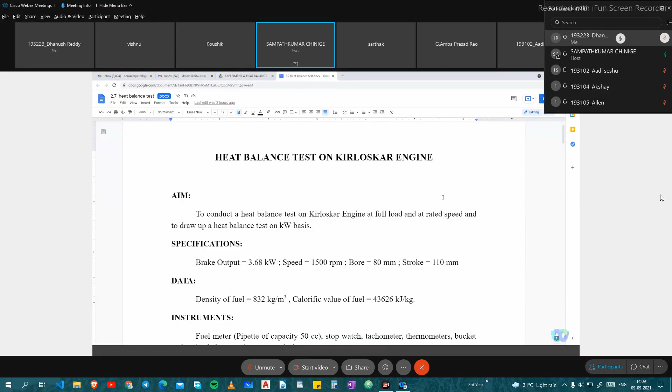You have 128. That's 120. 40 and 40 maybe. 40 from A section and 40 from B section. One series is more than the other, I think. More A section people than B section, sir. Yeah.

One is not there. 2, 3 not there. 4, 5, 7, 8, 9, 10, 11 not there. 12, 13 not there. 15, 16, 17, 18, 20, 21 not there. So some

Gupta sir, now you are sharing, sir. Sorry, sharing the screen now. Anybody can do that. I can restrict, but I allowed that anyone can share. Among the faculty? Among the students also, if they want to share, immediately they can do. If they have done some calculations, they can immediately share and show it. Okay.

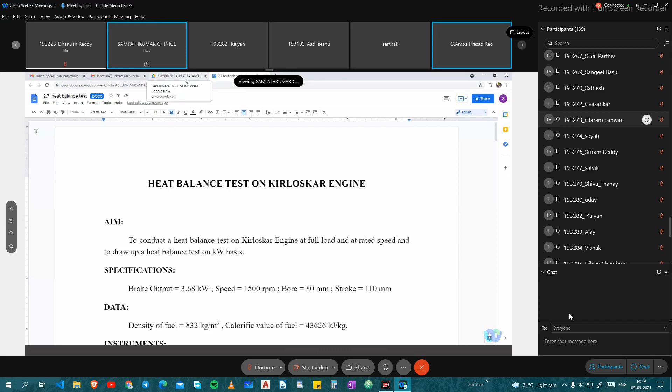Yeah, as I was telling you, this particular experiment is a heat balance test on a Kirloskar engine. The make is Kirloskar; it is a single cylinder, water cooled, vertical cylinder diesel engine. As the name suggests, we are balancing. What we are balancing: we are trying to see how the energy distribution takes place in a typical diesel engine. So it is also called an energy balance test.

So whatever input we are giving in the form of fuel, which carries some calorific value, how is that energy being distributed? As I told you, the engine is a classical example of a corollary of the second law of thermodynamics, and our engines work under the constraints of the laws of thermodynamics. Unless there is a sink, unless you lose or dissipate the heat in another form, useful power cannot be obtained. That was the Kelvin-Planck statement of the second law of thermodynamics. Accordingly, our engines are functioning.

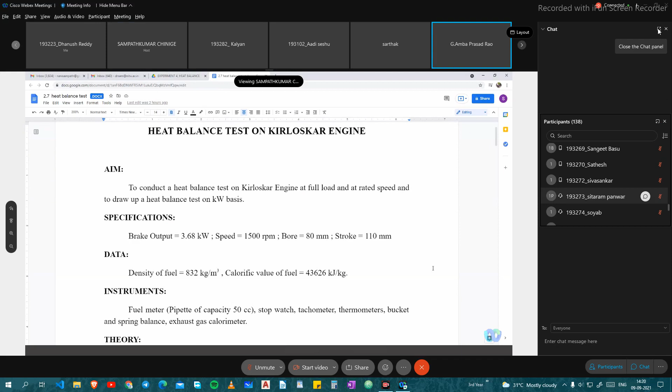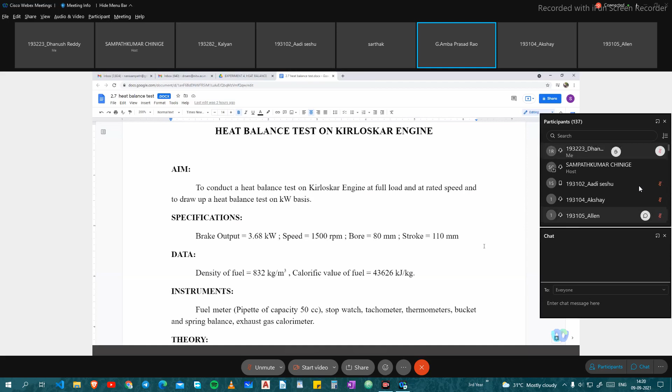So in a practical engine, how does the energy distribution take place? For that, we are conducting the experiment. The basic aim of this experiment is to conduct a heat balance test on a Kirloskar engine at full load. In our experiment, we have conducted it at half the full load and at rated speed, and draw up a heat balance test on a kilowatt basis. These are the specifications of the engine, which I have shown earlier.

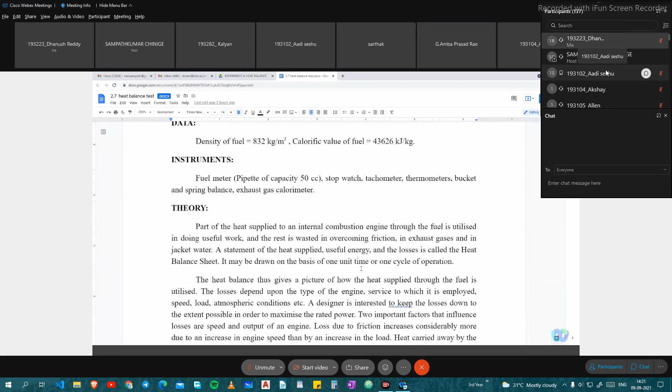We conducted an engine performance test on a Kirloskar engine, which was connected to a DC shunt dynamometer. The specifications of that engine and the engine on which we are performing the heat balance test are one and the same. The data of the fuel is as follows, and what we require in addition to the engine test setup are a fuel flow meter, stopwatch, tachometer, and thermometers at strategic locations, and the bucket, meaning a measuring jar. Instead of a bucket, we have a measuring jar, and we have what is called a spring balance.

Instead of a spring balance, as I told you earlier, we used to have a bucket where we collect the water from the engine outlet, the jacket water outflow, and with the help of a spring balance we used to weigh that water and know how much water is flowing through the engine. Of course, the engine is incorporated with the exhaust gas calorimeter. These are the basic instrumentation we require for the conduct of the heat balance test.

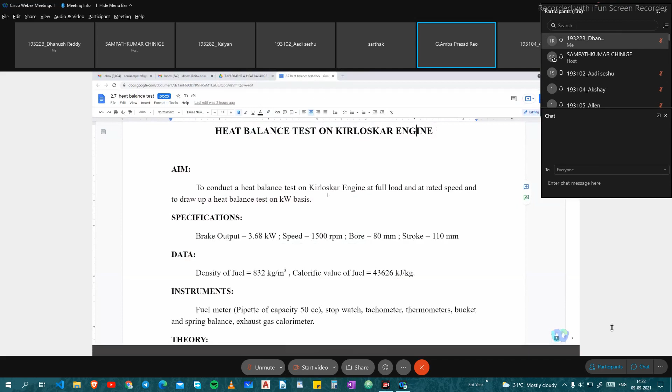As I told you, heat is given in the form of fuel: mass flow rate of fuel multiplied by calorific value of fuel. This product, mass flow rate of fuel multiplied by calorific value of fuel, we have taken as the denominator while calculating the thermal efficiency of an engine. Do you agree with me? Please say yes or no.

Yes, sir. Yeah. So, hoping that you would have done the required calculations in the performance test on a single cylinder engine, which I explained last class. So that denominator is the heat input, and we also observed that you got some efficiency like 28%. How much thermal efficiency at full load did you get?

Can anybody give the values? Sarthak, Vishnu, Akshay, Allen, whoever. You have calculated, no? Sudarshan Reddy, Geeta, Manoj, somebody should speak out. Aadi Seshu, Akshay, no response?

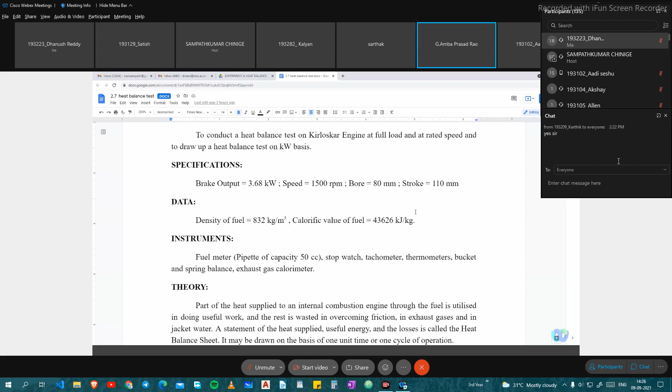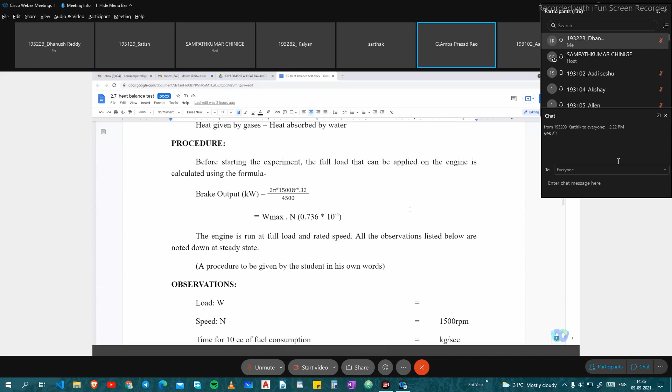Suppose you are coming to the hostel after vacation from your home, and your papa gives you 10,000 rupees as monthly expenditure, with an expectation that you would pay about 6,000 towards your food expenses in the hostel and the remaining 4,000 towards your books or something. You will try to manage your food amount to 6,000; that 6,000 you are paying in the hostel.

Out of this 4,000, you go to movies, you give your friend some loan, or you would have borrowed some loan from your friends and you pay it back. And sometimes you will do over expenditure. So likewise, you will try to manage. If you are a good manager of the amount taken from your parents, you will try to maintain some balance sheet.

Or even for shopping, if you go taking 1 lakh rupees, at the end of the day after coming back from the market, you will account how much you have spent, where you have gone right or wrong. So you do some balance like that in terms of money. Similarly, for an engine, how much it is taking, how much useful power it is developing, and how much loss it is leaving, we are accounting. It is an accounting of energy taken by the engine in the form of fuel input. So for that, there is a systematic procedure.

And the objective of this particular experiment is to show that at full load. So how do we arrive at the full load?

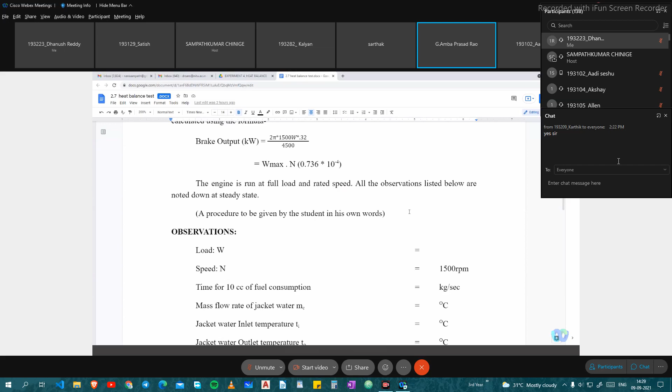W into R. R means the distance from the center line of the engine at which the load is being acted. That is the torque arm distance. So 32 centimeters away from the center line of the engine, the load is acted. So we take all that, and finally the variables are W and the speed. Because it is a constant speed engine, only W is a variable.

So what is the W max? Maximum power we must know. 3.68 we have seen on the top side. So if I equate it to 3.68, we come out around a value of 7.5 units. So I load the engine by altering the water flow going into the engine. In a short while I will show the video where exactly water is flowing to the engine and how it is being controlled, so that the engine spring balance will show the reading equivalent to 7.5.

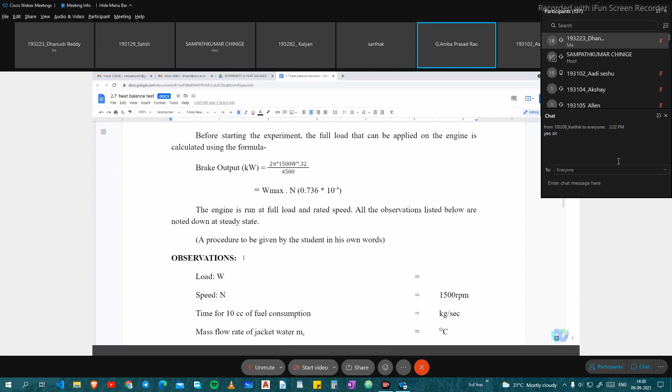Because our experiment is aimed at conducting half the full load, we are trying to load the engine to 3.75 units, but allowing fuel to the engine in such a way that it will run at 1500 RPM, because this experiment is again at a constant speed. So likewise, we bring the engine to half load or full load at rated speed, and the remaining observations are made. So let us see the demonstration of the engine while running.

Please, Sampath Kumar garu. Yes, sir. Yes. So while conducting the experiment, I will also explain how it is started, where the intricate components are. Okay, please. Sir, is the video available, sir? Yeah, it is being shown. Yes, you can play.

It's no volume, no? It's not coming, sir. Volume is not coming. Sir, once try sharing files. In the share option, there is a file share option, right side in upper tabs. When you click on share, it will show window, file, whiteboard. Try sharing file, why it's not visible. The video is not visible. Visible, but not audible. Audio, sir, it's an audio problem, right?

Just a moment. So what you are saying? Can you repeat? Once open WebEx, sir.

Should I stop sharing? No need, sir, once open WebEx, I want to know something. Like I also don't know, sir, but that option, it is basically played in the morning. When we checked it, actually it should come. Just a moment, it's basically to do with the voice, nothing else. Initially it was not there, I think, Dr. Sampath. Afterwards you gave volume, no? Can you try now, sir? Let's try once, just move it further.

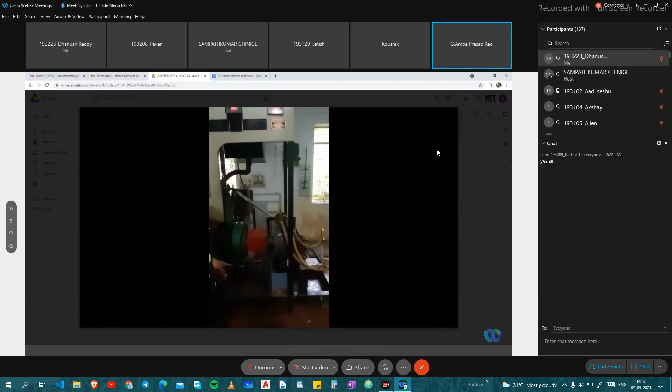So this, as you are seeing, this engine setup is different from what we had earlier when we were conducting the performance test on a single cylinder engine. Of course, the green part you are seeing is the engine part. So here this is a dynamometer, and these are all the plastic tubings for water flow. As I told you, it's a water brake dynamometer. So these pipelines are going into the dynamometer, and there are control valves by which you can regulate the flow of water into the dynamometer by observing it. So there are two valves here, and this is the spring balance.

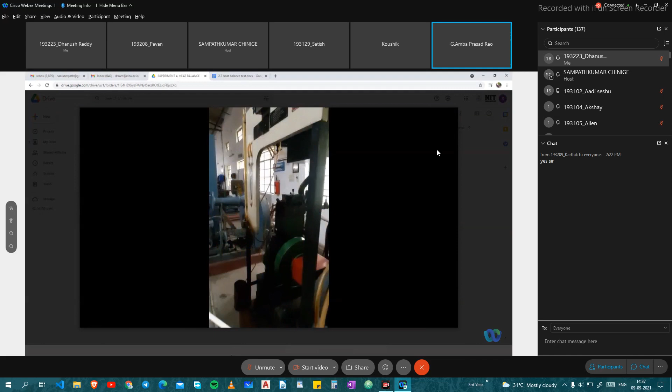So on this, as I told you, the 7.5 or so, any value. Let us say half the load means 3.75, or part load means again 1.8, or so. Likewise, you can get the values.

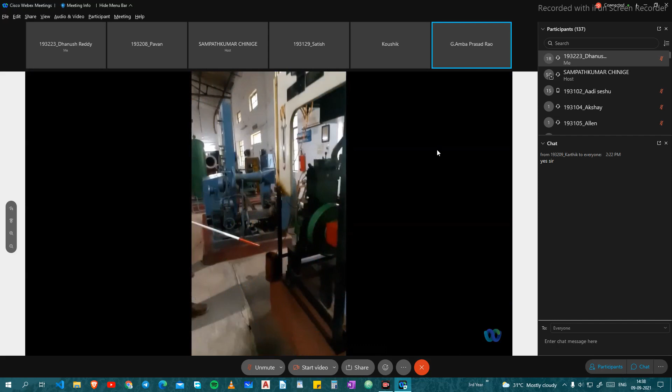So as far as this dynamometer setup is concerned, as I told you, with the help of the stick I am trying to show you the water flow in and out of the dynamometer. So now I am trying to show you how the fuel flow is happening here.

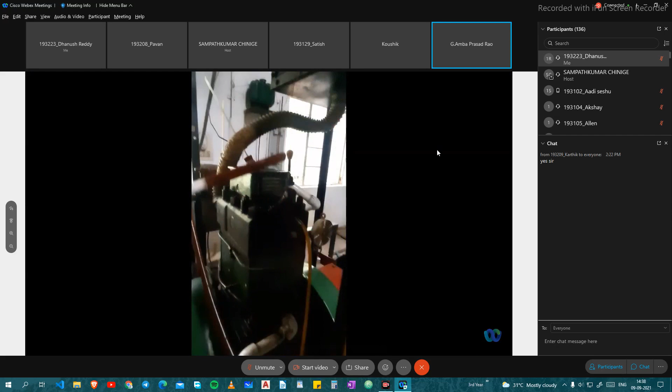So when you are starting, this is a decompression lever which is in the vertical position, and there is a camshaft here with the crank lever. We'll try to rotate this for giving initial momentum, and there is a fuel injector here to which the fuel is coming, from the fuel injection pump.

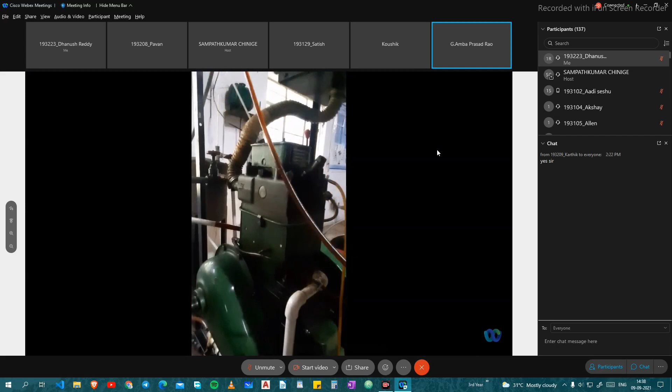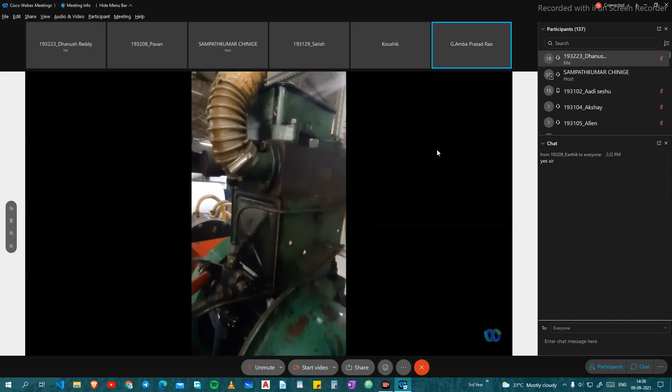So to this fuel injection pump, the fuel is coming from the filter, and if you move back, this one alters the amount of fuel being injected for regulation of load or speed. So like a rack and pinion, it is controlled similar to your accelerator pedal in an actual engine connected to that one. So this is the setup wherein we have an exhaust gas calorimeter.

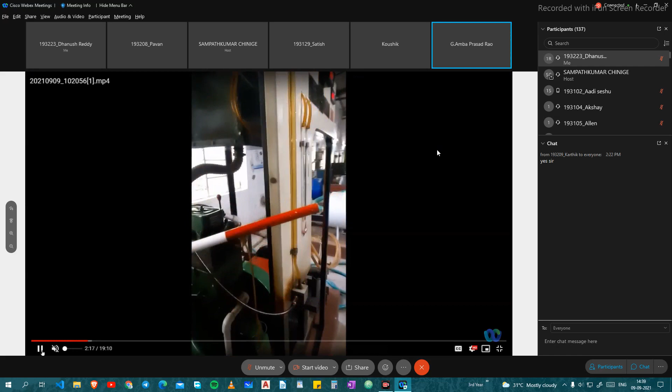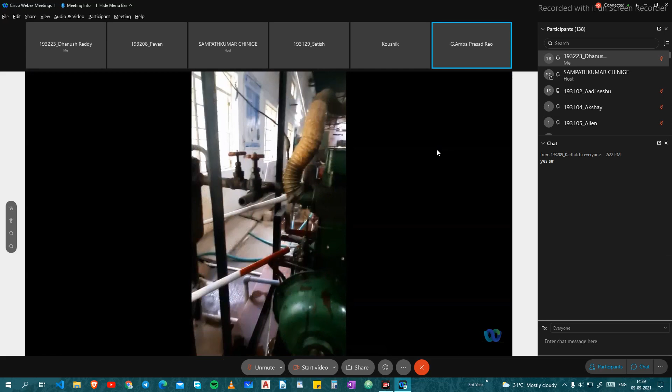So the fuel tank is here. This is a burette arrangement for measuring the flow of fuel to the engine. This is showing the fuel line: fuel filter, fuel pump, and finally to the injectors. This is the input going to the engine.

Let us see the airflow. This is the intake manifold.

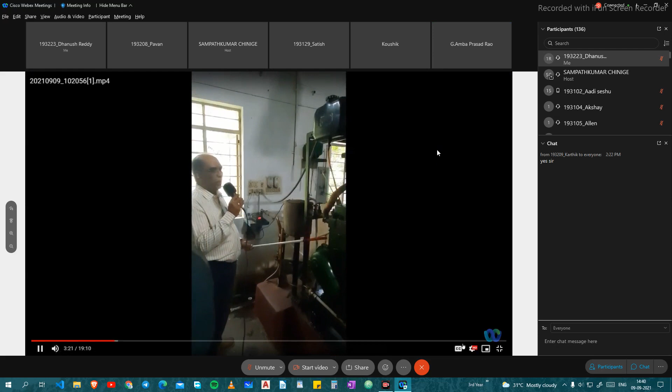Okay, you start moving it when it comes to the water flow, no?

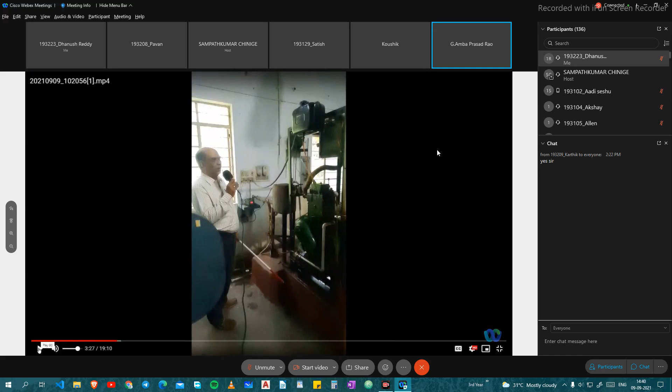Yeah, you see there is a provision for the engine to take water from the mains, the main fuel tank, your water tank in the laboratory. It is entering at the bottom side of the engine because it's the engine cylinder head. This is the cylinder, so at this corner...

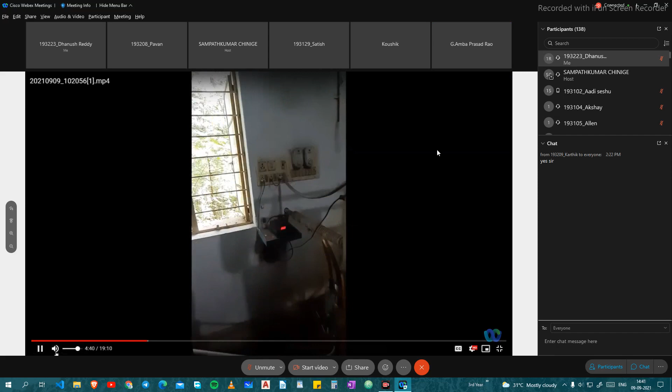Yeah, so this water flow white line is shown, no? So finally it is going at the bottom side.

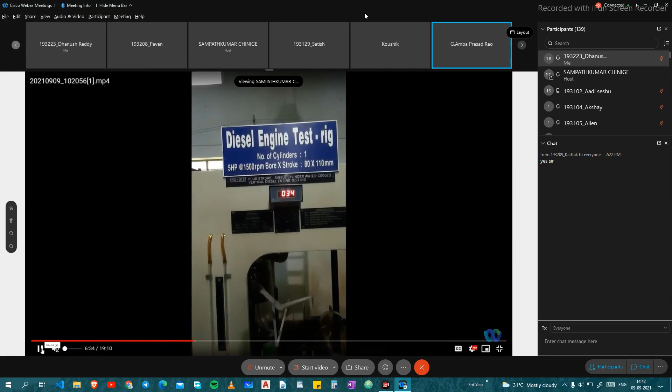As the nameplate details show, 5 HP and 1500 RPM as usual. So there is a digital indicator. This is actually meant for knowing the exhaust gas temperature leaving the engine cylinders, exactly at the exit of the engine exhaust manifold.

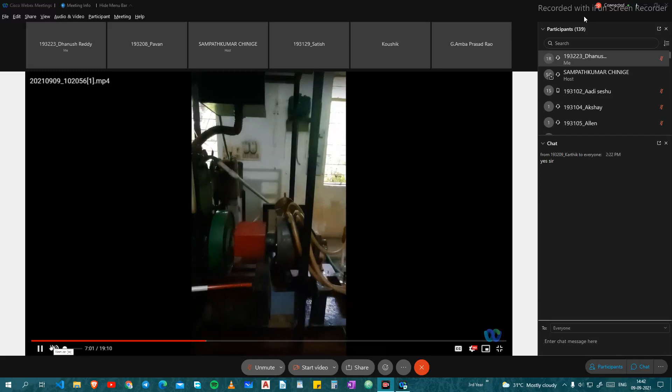Still I'm showing the dynamometer load reading on the...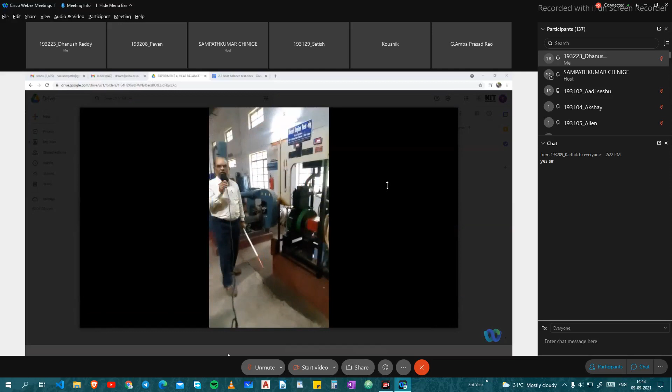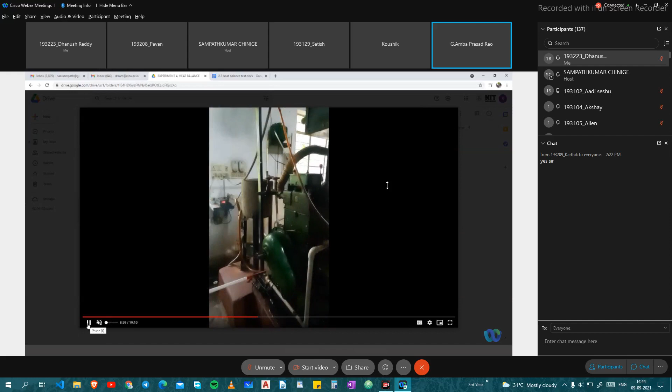Yeah, exactly. Now you see the water flow is entering at the bottom of the cylinder water jackets, and it gets circulated and heated up, and rises to the top, and finally water leaves from this seal. So we have a thermometer inserted here to know the incoming water temperature, and finally it is moving here, and on the other side you can see the water leaving the engine cylinder.

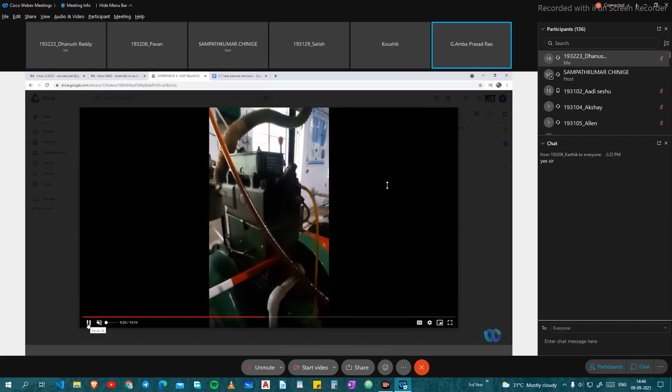So this inclined thermometer is being shown now. See here, finally, due to the thermosyphonic effect and convection, the water gets heated up and rises to the top. Then finally this thermometer gives you the exit water temperature leaving the engine cylinder, and this white water line goes out, where you can collect water to know how much water has been flowing through the engine cylinders.

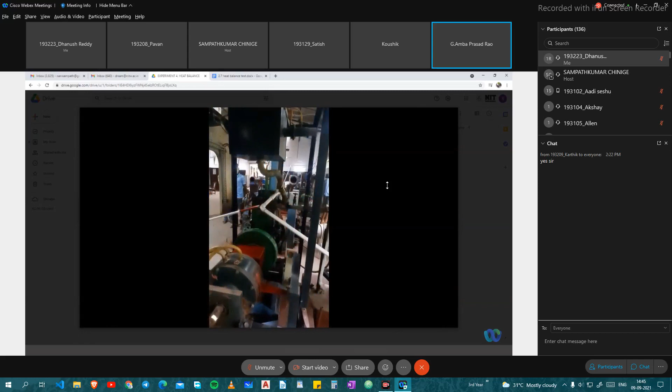So that is with respect to the water line. Don't get mistaken, these plastic tubings are with respect to the dynamometer, and this white tube is with respect to the engine coolant water. Okay, so here we collect the water in a measuring jar.

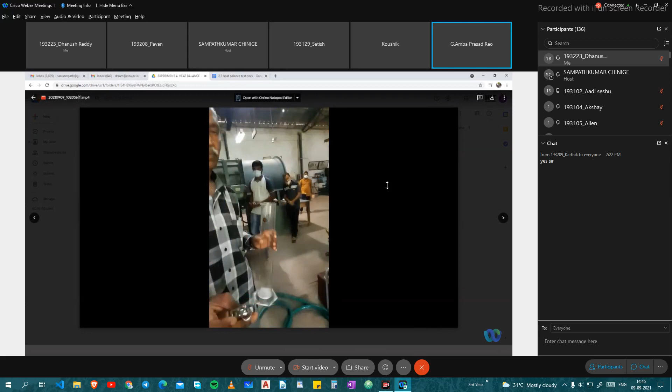With the help of this measuring jar, we collect some quantity of water. When you start inserting under this one tap, you start the stopwatch and then collect some water and stop the stop clock. So you can come out without having the parallax error, and you note down the time taken, have you measured, no?

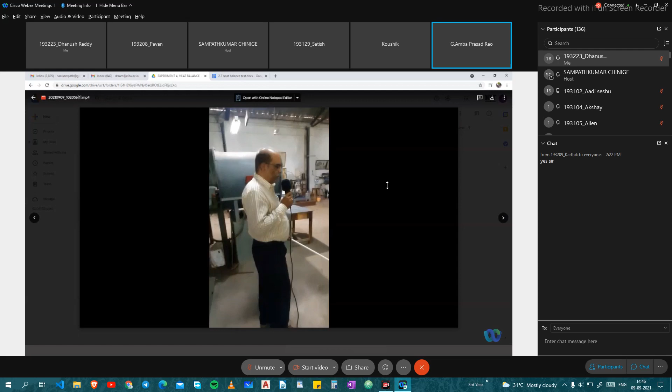So you know the quantity collected and the time measured, so you can know the mass flow rate of water. The mass flow rate of water, any heat given out or heat lost, is calculated by means of M Cp delta T. So the mass flow of water, the volume flow rate of water we have measured through that jar, as well as time, multiplied with the density will give the mass flow rate, and Cp of water, as you know, is 4.18 kilojoules per kg Kelvin into delta T.

The delta T, as I showed you, is the exit temperature of water minus the intake temperature of water. So that is the heat lost through the engine coolant water. And now we have to account for exhaust gas losses.

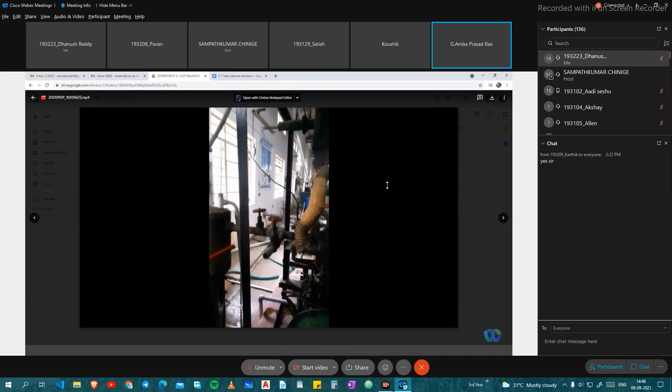So for that we should know the temperature of the exhaust gases. There is a resistance temperature device provided here at the very exit of the exhaust manifold. This is the intake air, and this is the exit, and it's finally connected to the device, because thermometers cannot measure very high temperatures, no? So there is what is called a resistance temperature device, with the help of which we measure digitally. This is a thermocouple inserted at the exit of the engine exhaust manifold. We have made an arrangement like an exhaust gas calorimeter, and normally a calorimeter is known for determining the value of specific heat.

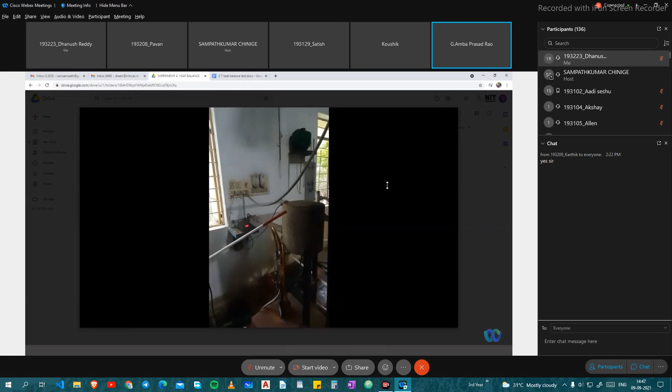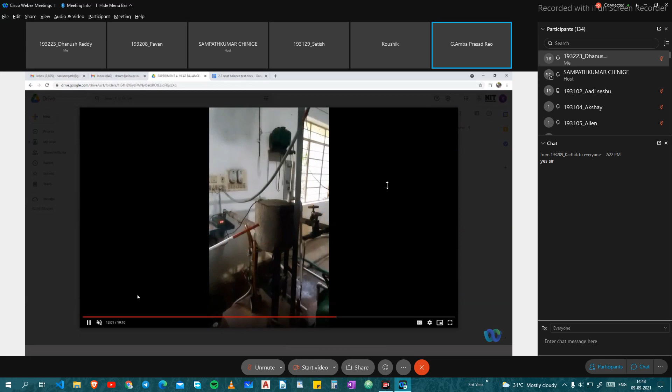We don't know the specific heat of exhaust gases or the mass flow rate of exhaust gases. So what are we trying to do? The exit gases leaving the engine pass through this tank, and inside we have circular spiral-like tubes through which water is flowing. The gases surrounding these tubes get absorbed by that heat, so heat flowing into the calorimeter and heat absorbed by the water is being balanced. Because this tank is insulated, the exhaust gases finally leave the engine room laboratory, and at the very exit we have a thermometer showing the temperature of the gases leaving the calorimeter with this digital thermometer.

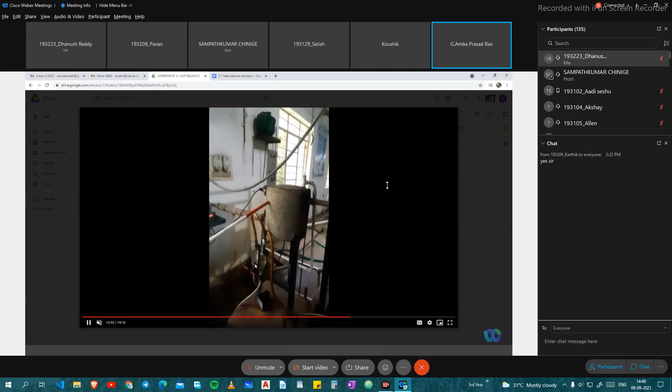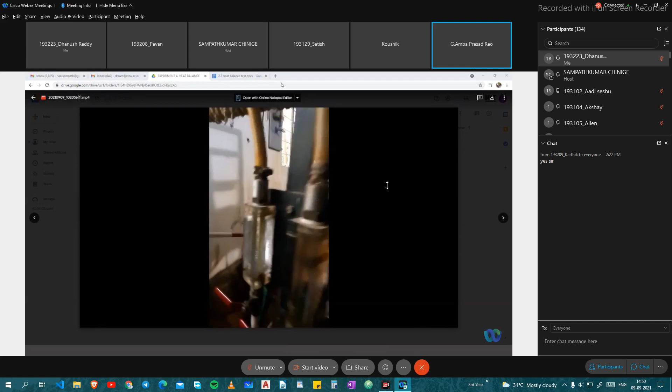These are the rotameters showing water flowing into the calorimeter. When we start the experiment, you can see the flow of water. One pipeline shows water flowing from the engine cylinders, and one outflow shows water flowing out of the calorimeter, so we should not get confused. One is the main setup, and the other is to know the heat capacity of exhaust gases.

So we'll know the thermal capacity of exhaust gas multiplied by the temperature difference. This is equivalent to the mass flow of water multiplied by the specific heat of water and the temperature difference in the calorimeter water flow. By equating these two, since this is also perfectly insulated, we apply the first law of thermodynamics, equalizing both sides, and finally we get the product of mass flow of exhaust gases multiplied by the heat capacity of exhaust gas.

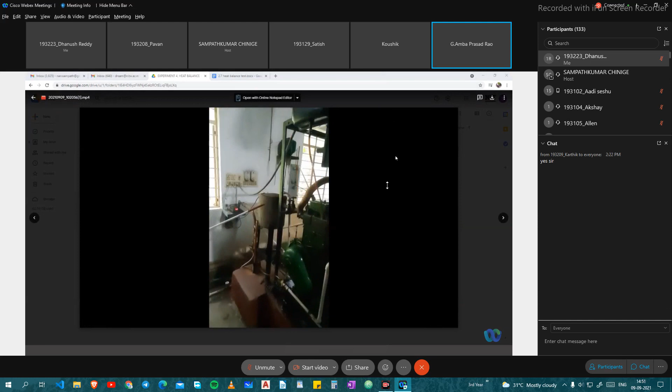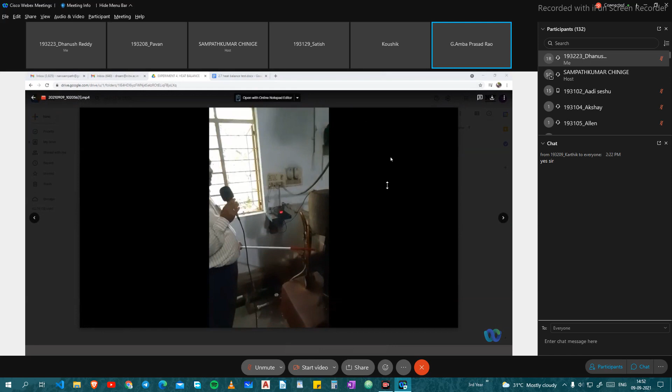So finally we have this heat capacity product. How do we calculate further? Once we get this product, we already know the exit temperature of exhaust gases, and this exit temperature, wherever the engine or vehicle runs, is the ambient temperature into which the exhaust gases expand. From that, the heat capacity multiplied by the exit temperature of exhaust gases minus the ambient temperature, which is the outside room temperature, gives us the heat loss through exhaust gases. That divided by the mass flow of fuel multiplied by the calorific value of fuel, and for the percentage we divide by that, gives us the percentage of heat loss through exhaust gases.

So now we are ready with the calculations for noting down the different values: percentage of heat loss through exhaust gases, percentage of heat loss through coolant water, and useful output, which is an indirect measure of thermal efficiency of the engine. From 100, if we subtract these values, we get the unaccounted losses. These unaccounted losses may partly be due to radiation, partly because of the fuel injection pump taking power from the engine, and there is also a pump supplying lubricating oil to different components. So all those ancillary components we are not exactly noting down, which makes us put it into unaccounted losses.

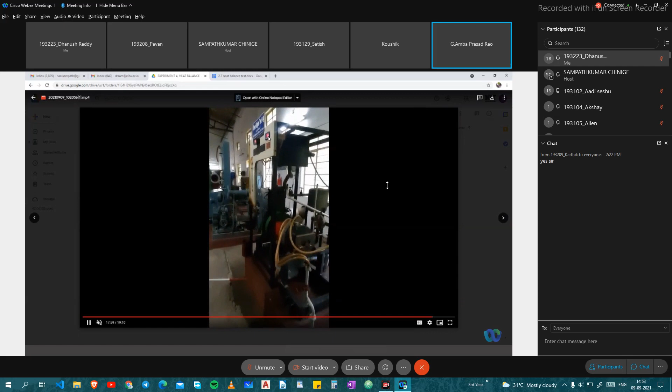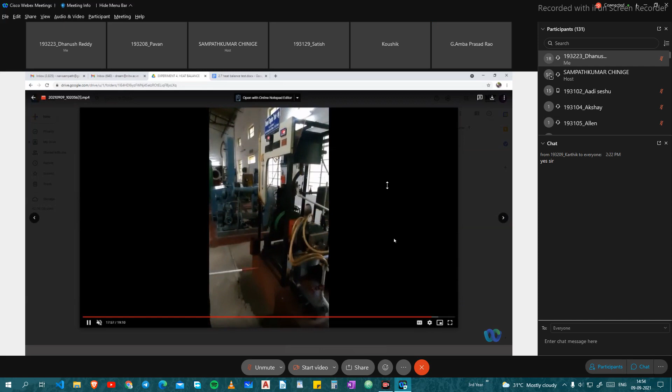1500 RPM can be seen at the crankshaft side. Of course, when the engine is steadily running, if there are no fluctuations in the load or in the spring balance reading, your speed also remains almost constant. It varies slightly by 10 or 20 RPM - within that range it is tolerable. So that's how we run the engine.

Once you have loaded the engine to the expected value - half load, full load, or quarter load, whatever you have decided - allow the engine to run for some time, half an hour let us say. In that period the values will come to steady state, and once there are no fluctuations in the speed, you note down the temperature at various strategic points, then calculate the percentages and draw the heat balance in the form of a pie diagram.

A pie diagram is a diagrammatic representation of the distribution of losses or energy supply. For example, after presenting the budget, the finance minister gives the distribution of fund allocation for various ministries in the form of a pie chart.

So how do we draw this pie chart? The input given is the mass flow rate of fuel multiplied by the calorific value of the fuel, which gives so many kilowatts. That kilowatt value I take as 360 degrees. Once I account that 360 degrees to that value, every percentage I get corresponds to how much percentage of this 360 degrees.

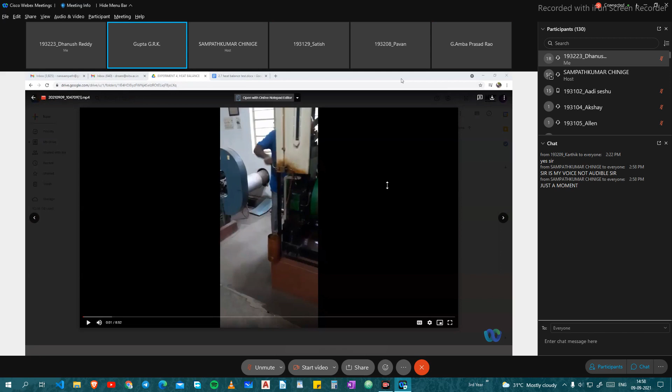Either the problem is with the video or something else. Now is it audible, sir? Yes, you are audible, now it's okay. Maybe the video audio also has some issue, because in the morning I purposefully spent some time playing the video with the audio, and one of my TOs assisted me. I am not sure why it is not coming now. So this video is being seen on your screen right now, I hope. Yeah, yeah.

So while taking the readings, you are showing that video. Hello Dr. Sampath, while taking the readings also you have taken a video, no? Yeah, this is the video, sir. If you are not seeing any screen or video now, sir - only a white screen. Okay, let me share it. Video is not coming. One second.

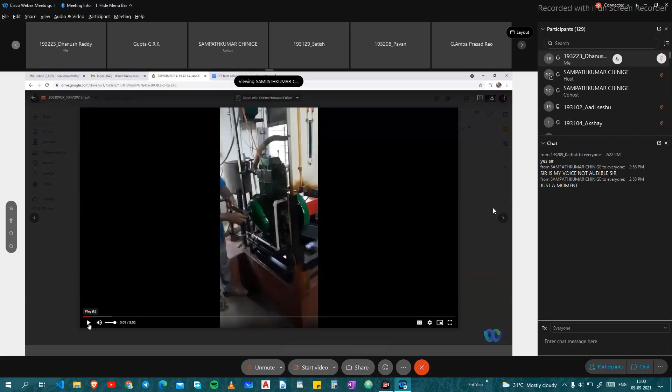Now the screen is shared, sir. Screen is shared. Yeah.

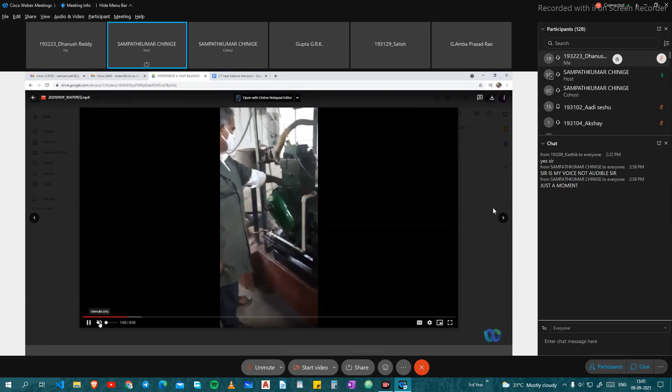We are trying to start the engine. You observe that the decompression lever is being engaged. Once the engine attains certain momentum, we immediately disengage it by bringing it into horizontal position. There was some problem because we had not supplied coolant water. They can see how it gets started and how the decompression lever is operated. As soon as he cranks it up, he switches off the decompression lever. Now it got started, sir. Engine started, no? Yes, sir.

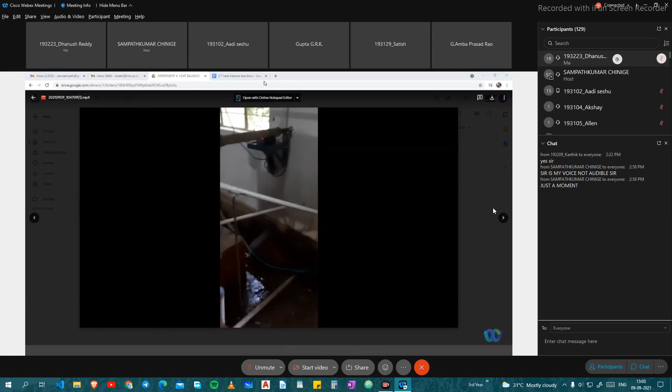This 303, 304, that is the exhaust gas temperature leaving the engine. This is speed, 1516. So this is the temperature at which the water flows into the engine coolant, and the water flow out of the engine cylinder is this one, jacket water. We got it around 56 or 58, I believe. So room temperature of water would be around 23 degrees. So this is the water which is flowing out of the jacket water.

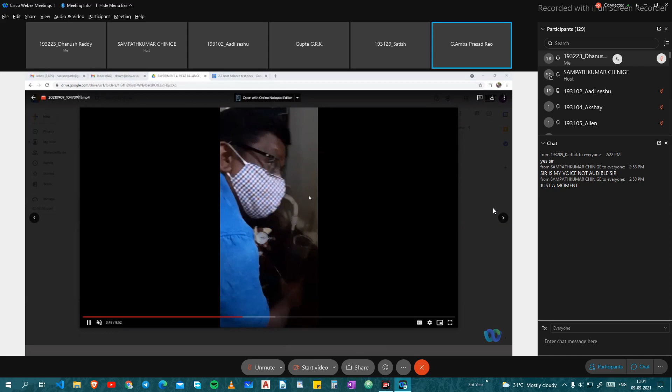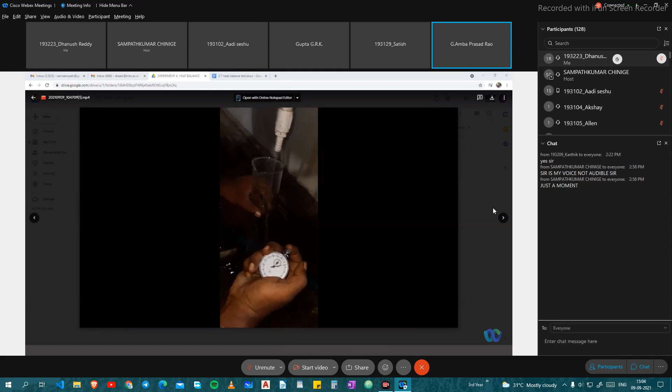There is another pipeline, no? So that is out of the calorimeter. A measuring flask with the help of which we are trying to collect some water, and as soon as you are keeping it here, you start the stopwatch. You collect whatever amount of water it may be. Yeah. It's a measuring jar because it is graduated.

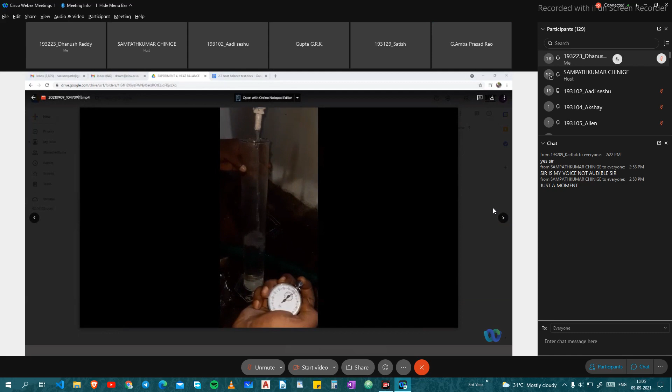You cannot exactly see the level of water in the jar by sitting down. So collect some water, fix it. Some time you fix it. Come out of that place and see without any parallax there. And I am trying to show you the calorimeter outflow of water. And here we are trying to insert one more jar to know the flow rate of water which is moving out of the calorimeter. So there are two pipelines, no? So here we are inserting.

A fuel flow of 10 cc of fuel. There are 10 marks here, from this point to there is a point marked here that accounts for about 10 cc. Once it starts here and reaches here, at that point you can comfortably start the stopwatch until it comes to this point.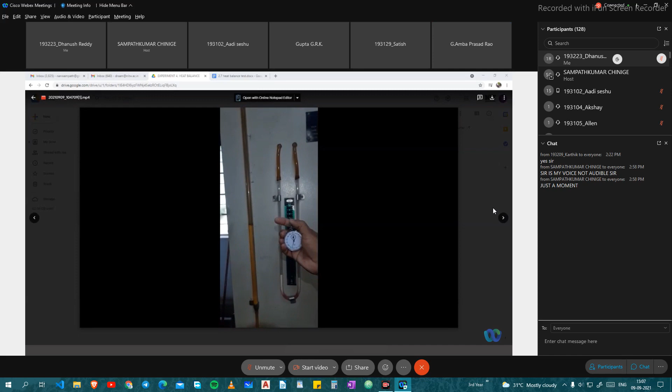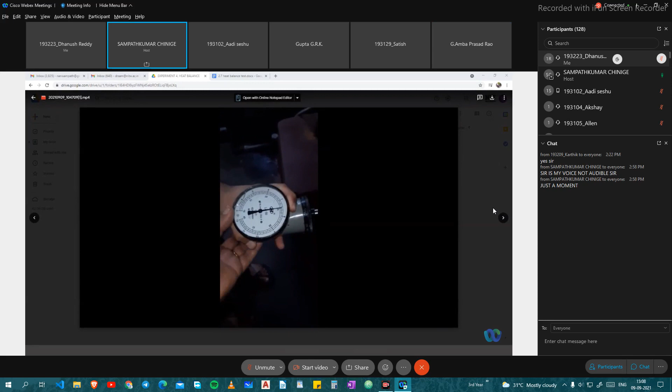Speed and RTD temperatures. With the help of a tachometer, you are trying to find out the RPM from the camshaft. It's taking the same reading at the crankshaft.

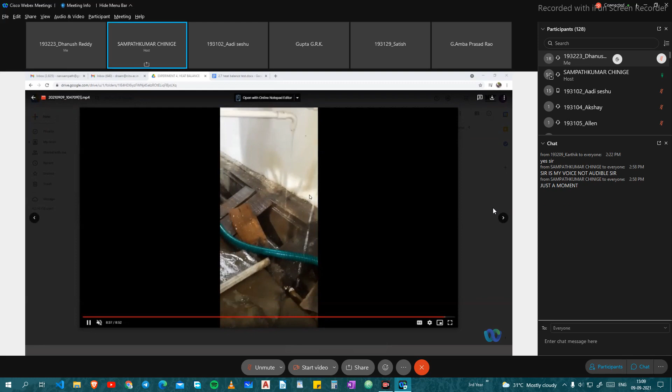You can see the fumes coming out through that. The water is so hot that you can see some fumes coming out. See here, some fumes are coming out. See? Hot vapors. So that is about the videos.

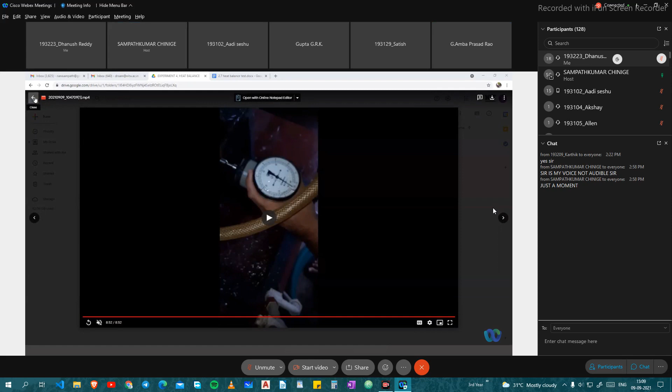Sir, this is the readings. So you will be sharing with them, no? Yes, sir. It's getting shared now. So all of you note down the readings, both at no load and full load. Zoom it, Sampath. Anyways, I'm sharing the whole folder with them, sir. They can also look at the videos as well as the manual, everything kept in a folder and shared with them.

Oh, 505 temperature came. These are readings that are taken long back, last semester. This is at half load, sir. So 505 is not a good indication. Engine is not in good condition. Normally, even at full load, it would be around 350 to 400. If it is giving this, it will reflect in the efficiency.

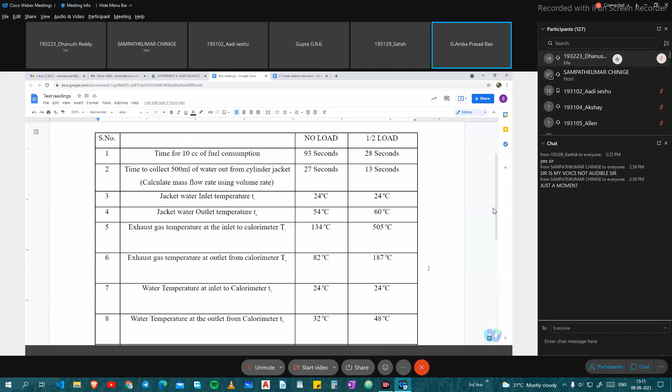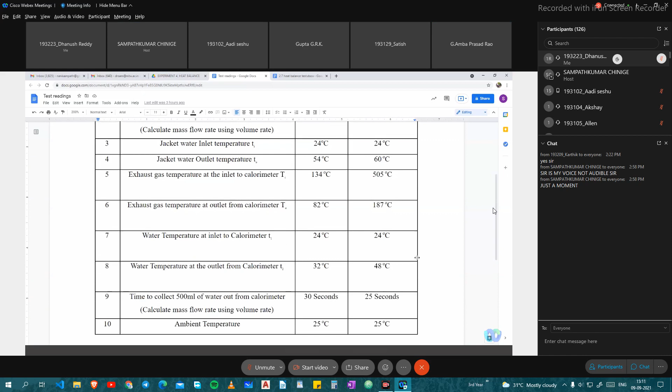When you go to a doctor, if you take some scan report, after seeing the diagnostics, your blood samples, your urine sample, your ECG readings, the doctor can ascertain the condition of a patient. Similarly, good engine test readings can be seen as the condition of an engine. So I'm trying to figure out what is the condition of an engine.

So have you taken the readings, students? Have you finished taking the readings? Yes, sir. Okay. Any doubts at this point of time?

One Mr. 193, 101, Sylvester Stallone.

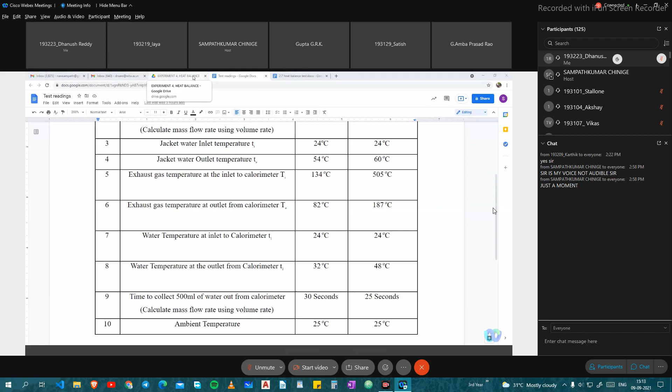Hello? Yes, sir. There was someone outside. Stallone. No reply. Sir, who is he? Sir, I'm the student Kaushik, sir.

Sir, water vapors are coming, but the temperature of the outlet water seems to be well below the vaporization temperature. Vaporization temperature means, once you come to a simmering stage, it also starts giving vapors. It doesn't mean that it should give at 100 degrees centigrade. The phase change takes place, and it is not distilled water, so normally ordinary water would be coming to the boiling point even before reaching 95.

Sir, can we apply the calorimeter equation at that point? Yeah, somewhat. A calorimeter reading means mass flow of gases multiplied by its temperature difference is equal to mass flow of water into temperature difference flowing out of the calorimeter. Sir, some water is evaporating, so some mass will be lost. That evaporation may have some difference with the flow rate of water collection, but that is accounted. You collect a very small sample, time taken. So you need not bother about vaporization losses.

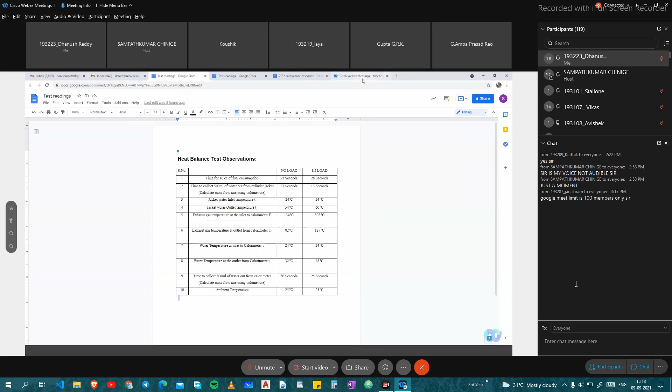Already people started leaving the class. Okay. But it is very heartening to know that out of 170 odd people, only 115, and we are 5 members. Yes, sir. So class representatives, please take care of these people now. But sir, what is the use? Even if you attend, we can't see who are attending or who are not. Even if I talk about me, I try to understand everything, but still I can't get the things. The virtual things are the worst. I can't get what you're trying to convey from that video.

Earlier also you faced this problem? Earlier our video was clear, no? Last class. Yeah, it is okay, but sir, learning the engines from the video is difficult. Who is that? Jayesh. Yes, sir. That's why I told you some people who are nearby can come and experience. It is not that we have recorded earlier and are trying to show you. You understand? Jayesh, do you feel that there's no use of attending the class then? Sir, I can't say like this. You are talking as if it is of no use. Sir, you're trying your best to convey everything. You can see the video later. That doesn't mean that you need not come to the class. If you have some doubts, we are here to clear those doubts.